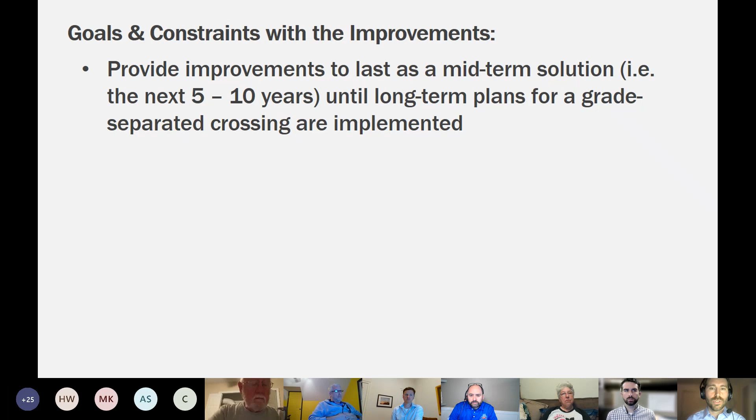So we know that's coming, but we also know that it's going to be realistically 5 to 10 years until we start construction on that project. We feel that we need something to last until then. We need an intermediate solution at this location and can't wait simply another 5 to 10 years until that bridge or tunnel is built. So the overarching goal was to provide some meaningful safety improvements at this crossing as a midterm solution. More specifically, we want to reduce the crossing distance for pedestrians and cyclists.

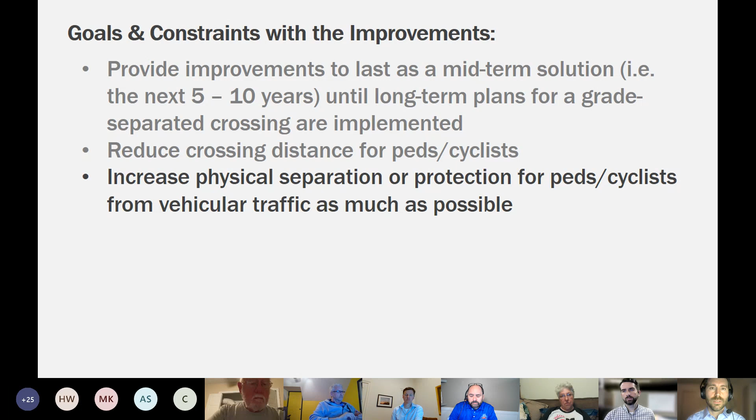We wanted to increase physical separation or protection for pedestrians and cyclists from vehicular traffic as much as possible. We heard complaints and we observed this issue of drivers at the northeast corner of the intersection where there is a slip lane, a free moving right turn lane from westbound Walnut Grove to northbound Farm Road, where drivers often don't comply with the crosswalk. By law, drivers, of course, are supposed to stop at that crosswalk and allow pedestrians or cyclists to cross, but that often doesn't happen. So we wanted to try and address that through design and improve compliance by drivers.

And now thinking a little bit about constraints, we wanted to do something that could reach construction in a relatively quick timeline, so within 12 months from when we started design. In other words, we didn't want to try and reinvent the wheel here. We wanted to use proven countermeasures that could be designed relatively quickly, that we knew would work, so that we could get something on the ground as soon as possible.

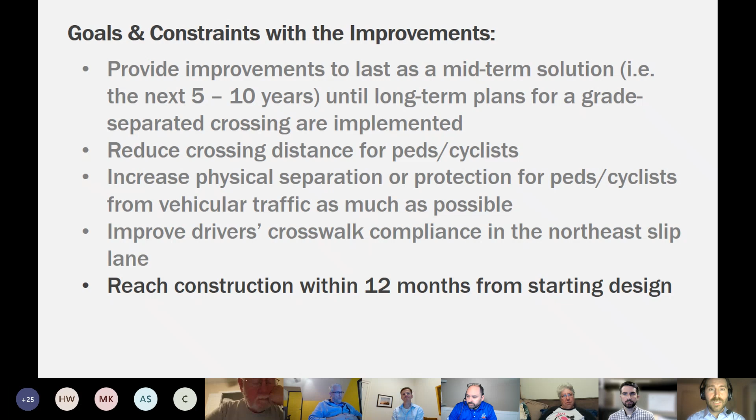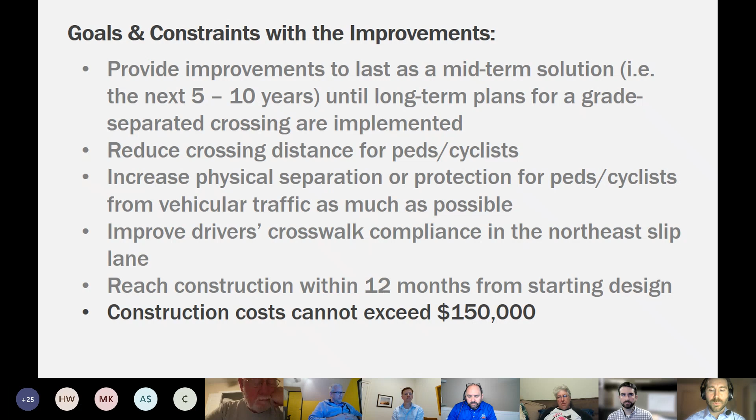And the last major constraint is budget. We were able to secure about $150,000 towards a construction budget on this project. So knowing our goals, this was probably the main constraint to work around. And I think we've done a really great job of accomplishing each of these goals, and you'll see that once we look at the proposals.

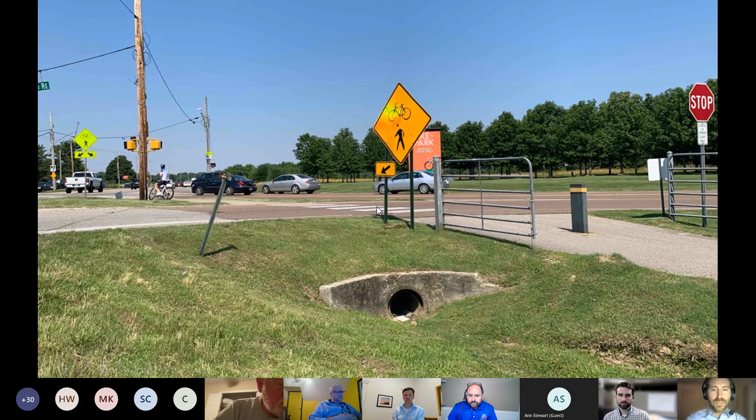Forward. So going down to ground level. So again, this is that slip lane at the northeast corner. You can actually see somebody waiting on this island out here at the light, waiting for the signal. There's a lot of signage out here. If a person is standing right here by this gate trying to cross the street, the signage that's here and the other objects that are here might impact a driver's ability to see that pedestrian or that cyclist who's waiting right here. So that's something that we took note of.

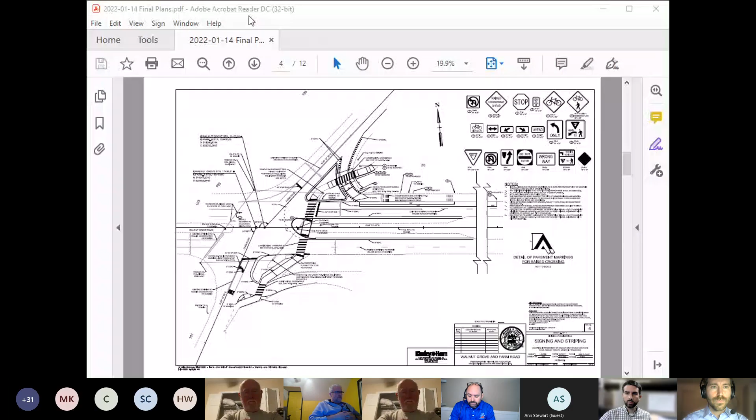So now we will get to the planned improvements. I'm going to switch my screen and pull up a PDF of the draft construction documents. So bear with me for 1 minute while I switch screens here. Okay, so we are now looking at the actual draft construction documents for our proposed improvements. I'm going to start again at that northeast corner up here. So let me zoom in to that area.

So first, to address the issue of drivers not complying with that crosswalk, flying by, not stopping for pedestrians, there are a number of things that we're doing to address that. So number one, on the lane that's approaching that slip lane, we were proposing to install new rumble strips across the lane. So these will actually be, you can almost think of them like miniature speed bumps. You probably have experienced something like this on the edge of a highway, those rumble strips, you drive over them, you feel those vibrations. It gets your attention as a driver and encourages you to slow down.

Number two, we will also be installing some new crosswalk warning signage that has flashing lights, some LED flashing lights. This is a relatively new type of sign. We only have a few examples of it in the city today, but it's solar powered. It operates 24/7. So you will see that installed, and the idea there is, of course, just something to get drivers' attention even more so through those flashing lights.

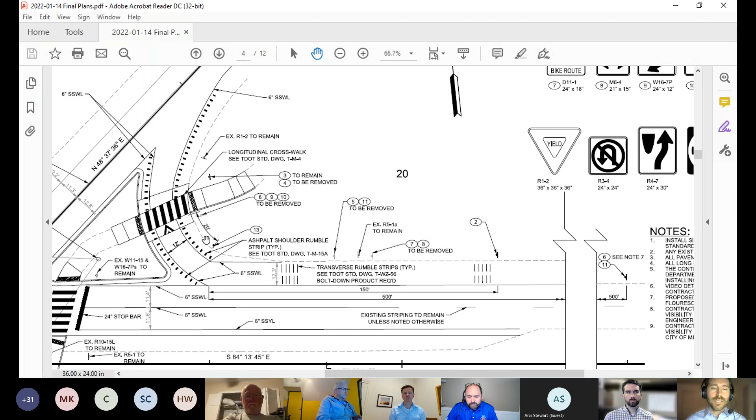This will be the first time in Memphis that we are using a raised crossing in this context, in a slip lane. But it is a proven countermeasure that we have seen and that we have learned about in other communities. For example, Boulder, Colorado uses raised crossings like this on a regular basis in slip lanes, and it has been shown to be effective at slowing down drivers and increasing compliance rates at the crosswalk. So I think this is something that's going to make a major difference.

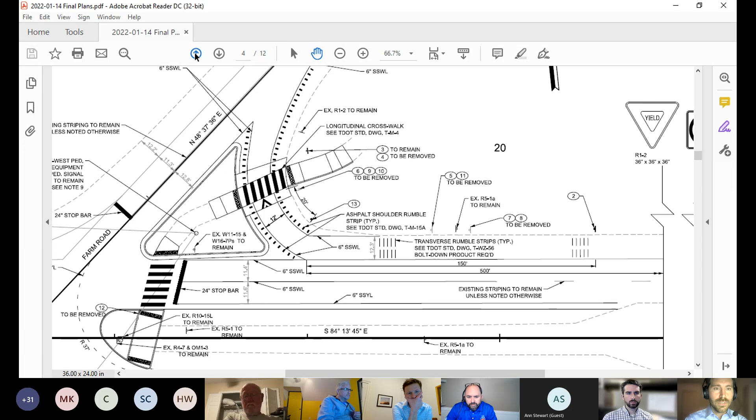As we continue across a little bit, we get to this triangular island. I mentioned earlier how the island is very level with surrounding areas. It doesn't really feel separated from traffic. We will be essentially rebuilding the entire island. There will be new curb and gutter extended or built on all sides of it. So unlike today where it's just grass that meets the edge of the asphalt, there will be a curb and gutter in place. But an even bigger change than just the curb and gutter, let me move to the other sheet here. So same location, I just changed sheets.

Again, here's the island. These dots you see, these are representing fixed metal bollards. So metal poles installed on both sides of the path, spaced about 6 feet apart from one another. These are not plastic. These are not something just adhered to the surface of the asphalt. These are true fixed metal bollards. So a true physical protection and barriers on either side of this path. That will, I believe, create a much stronger sense of separation and protection for anyone who is waiting there.

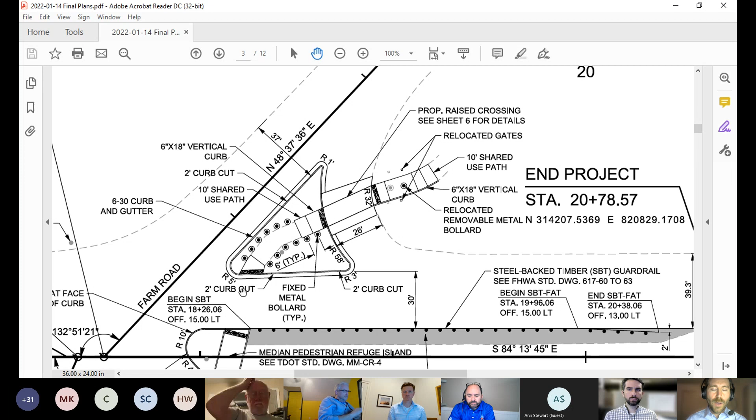The other thing I think it will do is by introducing both these bollards and this curb on the edge of this roadway, drivers as they're passing here will naturally want to slow down a little bit as well, because now they're seeing some fixed objects right there at the edge of the roadway. That will encourage them to slow down a little bit as well.

So continuing across that crossing, we get to the median. Right off, you can probably notice that we have straightened the crosswalk. Previously the crosswalk went more at an angle across. It's been straightened out. By straightening like that, we have actually reduced the crossing distance, which allows people to get across a lot quicker. The second thing you may notice is that the crosswalk has now moved behind the nose of the median, or the cap of the median right here.

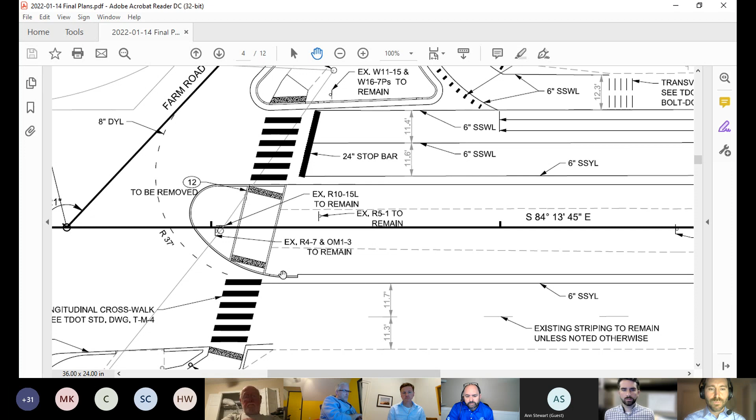So again, previously, the crosswalk was over here. Somebody crossing here probably would have felt exposed to moving traffic or traffic that's just waiting there. Now, the crosswalk is behind that. It's offering a stronger sense of separation from traffic. This too would have a concrete curb around it. But another significant change is the width of the median. We are actually proposing to widen the median by removing surplus asphalt.

On the north side, presently, there is a westbound left turn lane to go onto Farm Road. We're proposing to eliminate that turn lane entirely and actually restrict left-hand turns at this intersection. The volume for left turns there, based on the traffic data that we have, is extremely low. There is very little need to have that left turn lane here. And if we could eliminate that left turn lane, that allows us to repurpose that space for widening the median and decreasing that crossing distance when people would be sharing space with cars, in other words, sharing space in the roadway on the asphalt.

So I'm glad to share that after talking about this with all of the stakeholders around this area, everyone was in agreement that the need for that left turn lane was very low, and that the safety benefits that would result by eliminating it were a better priority. So we are proposing to eliminate that left turn lane entirely. That would move the edge of the median more to the north.

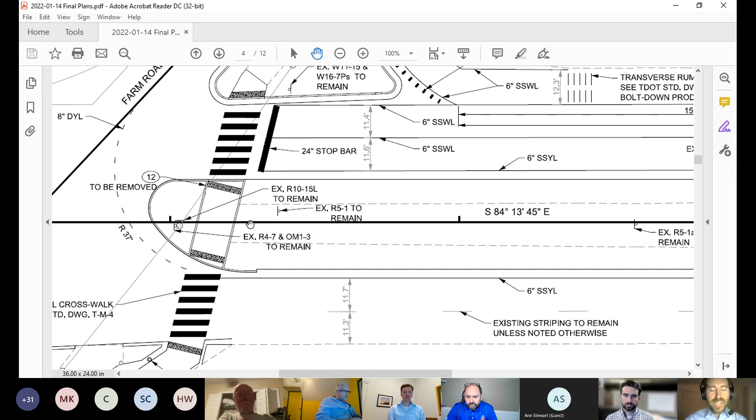On the south side of that median, there again is surplus space. There's about a 10-foot expanse of asphalt that really is not needed. It's not used. So we can also eliminate that, and we're proposing to widen the median on that side as well. So in the end, we would end up with about a 25 to 30 foot wide median here, taking that space back from the asphalt.

And then I also want to note that on the north side of that median, let me switch back up to this sheet. So here you can maybe better see the darker gray. That represents the asphalt that is being removed and allowing the median to be widened. On the north side of the median, we are also proposing fixed guardrail. So that would line this whole north side of the median.

This would be timber steel-backed guardrail. So it would have a steel structure, but would have a timber or a wooden surface to it. There are a few examples of this in the Memphis area, notably on Wolf River Boulevard in Germantown. Maybe you've seen it there.

For one, the obvious benefit of providing that physical barrier, and also just with this being in the heart of Shelby Farms, we did want to have a little consideration at least to aesthetics where possible. So we thought rather than having just typical metal guardrail like you might see along the interstate, that wooden guardrail would look a little nicer and frankly have some other possible maintenance benefits as well. So again, it's a steel structure internally or steel backed, but has that wooden surface to it.

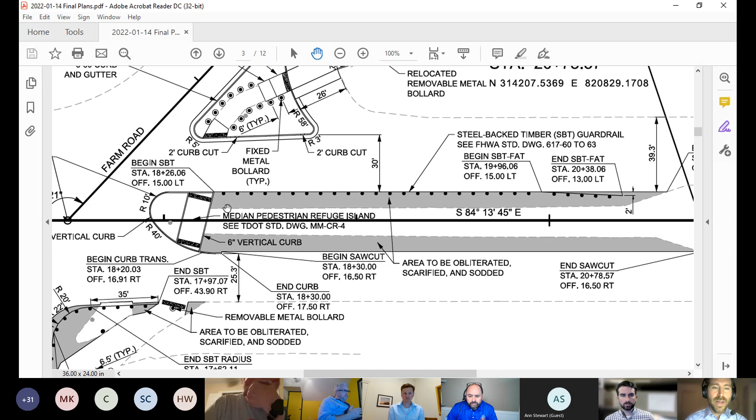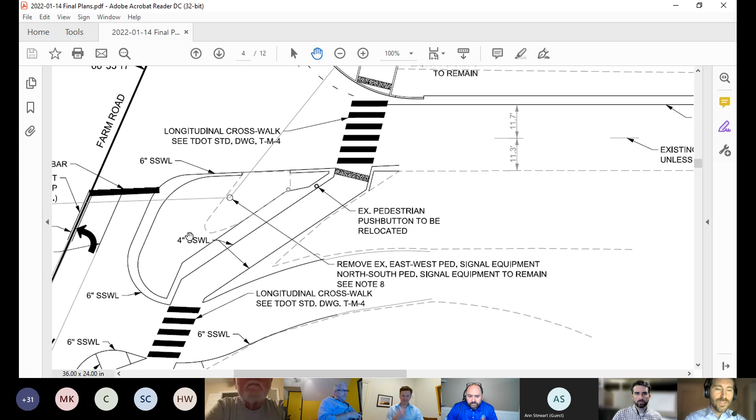Continuing to the south, switching back to this sheet. Again, you have a much shorter crossing distance for those eastbound lanes because we've widened the median. Once you get down here, pretty much what we have in place right now with those interim improvements, that layout would remain the same, but we would be making it more permanent. So removing excess asphalt around here, and then also installing a permanent guardrail along here as well.

So I guess I could have stayed on that previous sheet, so I'll go back up there. But you can see that here. So here we are again at that south side, this black line with black dots you see curving around, that is the guardrail that would be put in place there.

We also are proposing to install some additional metal bollards on the south side of this asphalt path to prevent drivers from mistakenly entering that area, or perhaps they're trying to go around traffic somehow and intentionally use that. Either way, these metal bollards that are placed here would prevent a driver from entering that area.

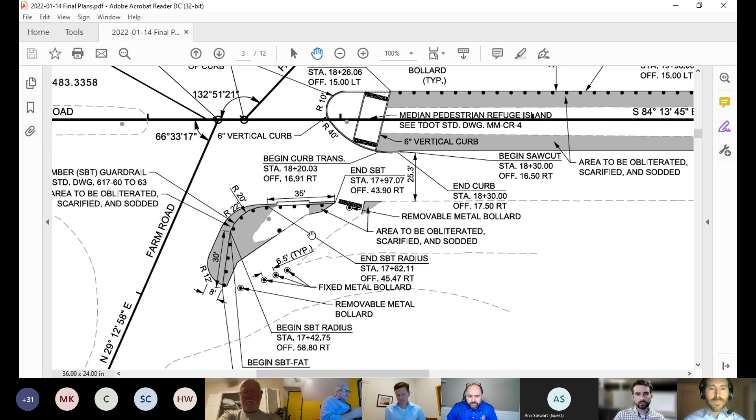So that is the overview of the proposed improvements, and there are a number of changes there that would be done, and when taken all together, I think will significantly improve safety and comfort at this crossing for the next several years to come. So I'm going to switch back to the slides. Bear with me 1 minute.

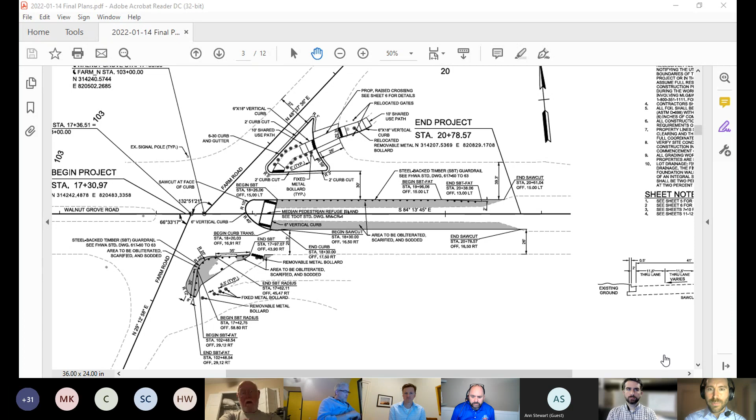Timeline. We're almost at the end here, so thank you for your patience so far. So timeline, we're looking to wrap up the construction documents next month. We'll then move into the bid letting. I would hope that we can start construction by July. I think that's a very realistic goal. And we should wrap up construction by this fall. The construction we're talking about is not that extensive, so if we can start in July, we should be able to wrap it up by the fall and have these improvements on the ground before the end of this year.

So before we open it up to just general Q&A, I do want to try and answer some of the frequently asked questions that we have already been hearing from people over the last several months. So I anticipate that some of you may have these exact same questions tonight. So let me just go ahead and try to address some of them now.

So number one, why doesn't the city build a bridge or tunnel across Walnut Grove? Well, we are. That is our plan. As part of the Shelby Farms Parkway project, we are going to build a grade separated crossing across Walnut Grove Road. The Shelby Farms Parkway project, though, is a federally funded project.

As such, there are a number of requirements and approvals we have to meet in order to get to construction. So it's a very long process, and I'll give an update on that here in a minute. But if for some reason we wanted to try to go ahead and do that bridge or that tunnel separately, in other words, if we wanted to pull out the bridge or tunnel from that existing project and do it on its own, one, we would need to get approval from the state to modify this existing project that is federally funded.

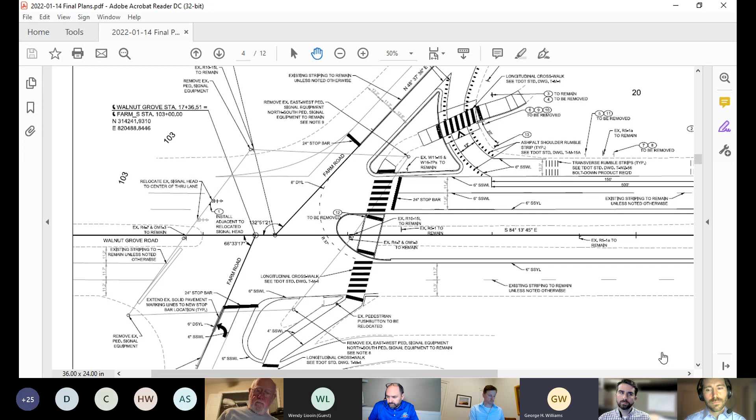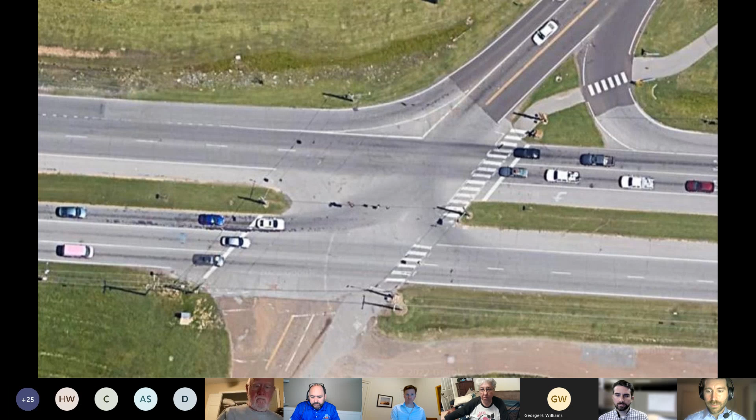Yeah, I just wanted to say thank you guys for the work you're doing. I literally live right on the Green Line, and it's absolutely marvelous, all the work that you've done and all the work you're doing. My only concern is how can we help educate the rest of the public about all the work you're doing? Does that make sense? Yes. Thank you for that question. In fact, I would say you are setting me up.

Bear with me. So one thing you can do is to connect people with us. We do have a presence online. You can go to Facebook and Twitter, at BikePed Memphis. Follow us online. We put updates on there of all the projects we are currently working on, good information about improving conditions for walking and biking. For example, earlier this week, together with colleagues at Public Works, we tested out a new miniature street sweeper that we are hoping to purchase for cleaning bike lanes around the city. We posted some videos of that test drive on our pages, so might be some fun videos to check out.

In addition to Facebook and Twitter, we have a website, bikepedmemphis.com. On there, you can find information about all the projects we're currently working on. It's a blog as well, so we may not update the blog as frequently as I would like, but we try to put out some interesting blog posts as much as we can. So I would say just directing people to these sources of information is probably the best way to connect with us.

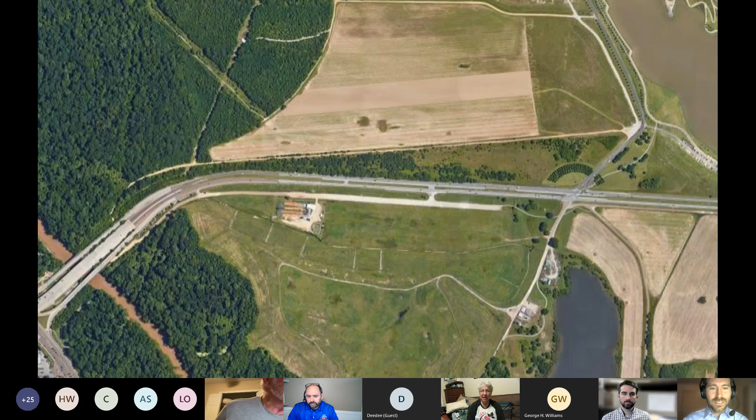So what I was showing you, the document with the draft plans I was describing, everything that I was showing you on that PDF, that is happening. Those were construction documents that I was showing you, the draft ones. We're in the process of finalizing those right now. They should be finished next month. From there, we will let it to bid, bring a contractor on.

We do have the funding secured for this. We have approximately $150,000 secured that will fund these improvements. Fabulous. I anticipate that we'll be starting construction in July, and, fingers crossed, if no bad weather or something slows us down, we should finish it by the fall.

Fantastic. So it's going to be a little bit of trail going over that median. Is that concrete going over the median part there, when you're coming across the street? It's not going over it in the sense of a bridge. It's going through the median. Oh, I see. Like a curb thing. Okay, I gotcha.

Very nice. Thank you so much. Again, like George said, we're so appreciative. Well, thank you, Wendy. Thanks, George. Appreciate the compliments. Like I said, we need your support. So thank you.